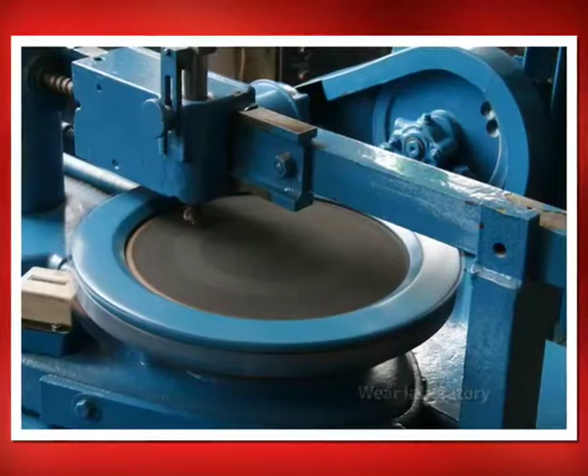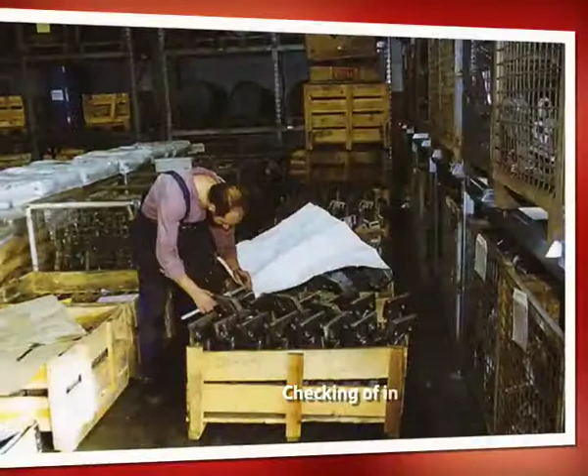Vautid's ongoing success is based on the research tradition established by its founder, Dr. Hans Wahl. The company's own laboratory systematically researches wear conditions and assesses hard-facing materials for suitability. Material solutions are created on the basis of this fundamental research that guarantee customers the highest quality and operating safety.

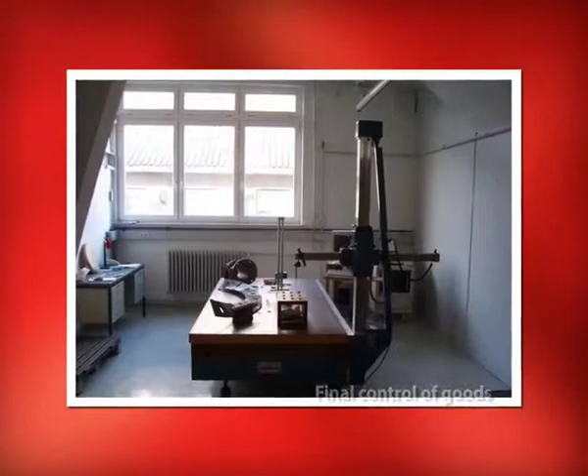The Vautid Group adheres to strict quality standards, from the receipt of goods to the final inspection, and is certified according to ISO 9001.

Vautid manufactures wear, heat and corrosion-resistant materials and products. Protection is supplied by build-up welding using hand electrodes, manufactured in Ostfildern near Stuttgart and dispatched around the world.

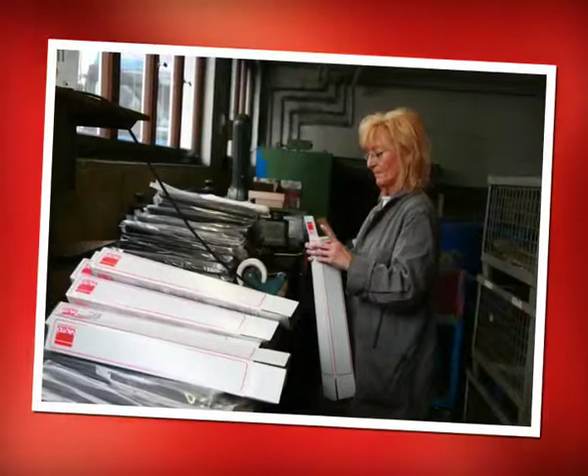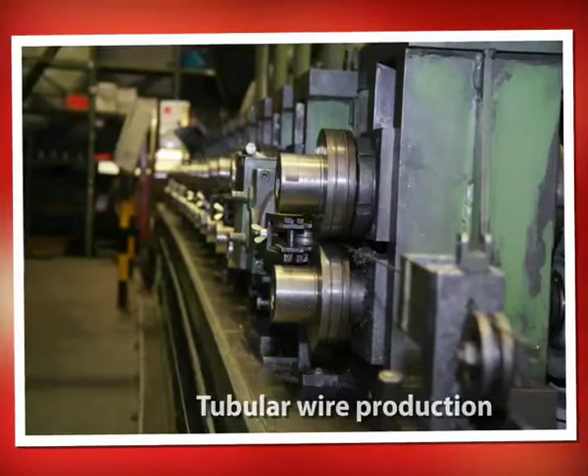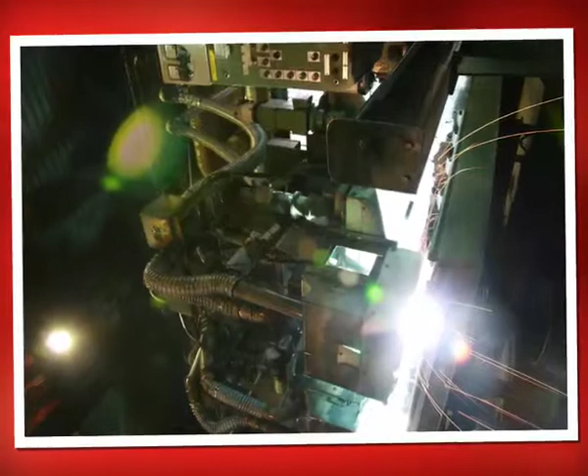A high-performance alternative to hand electrodes is offered by tubular wire, also produced in Ostfildern. Wear plates made of normal steel with a hard-facing layer of between 3 and 17 mm thickness have been part of the company's product range for over 30 years. These wear plates are produced in Wendlingen using the latest in plant technology.

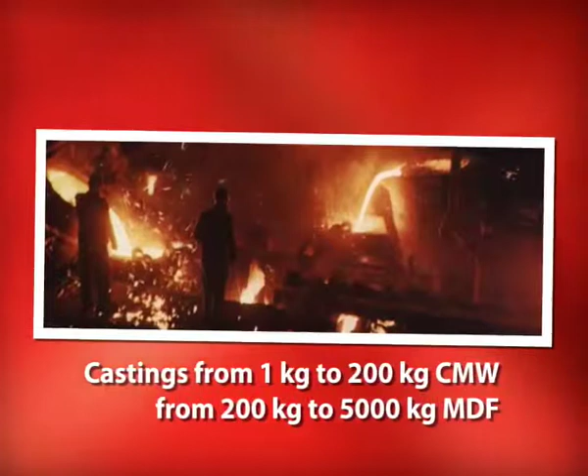At the same time, the company began developing wear-resistant casting materials. Vautid's 3 Portuguese foundries manufacture cast components in a range of weights from 1 kg to 5,000 kg. Typical materials are chill, steel or even manganese steel castings.

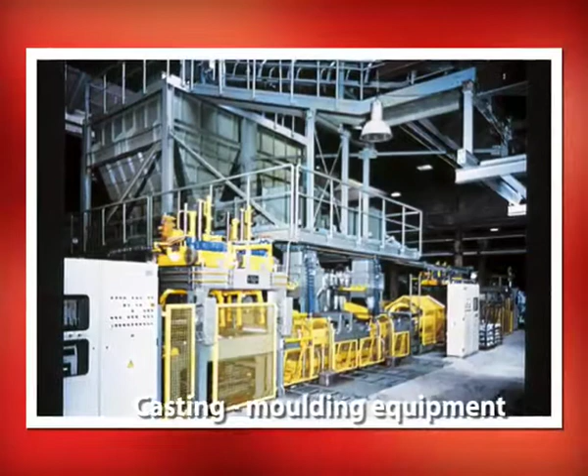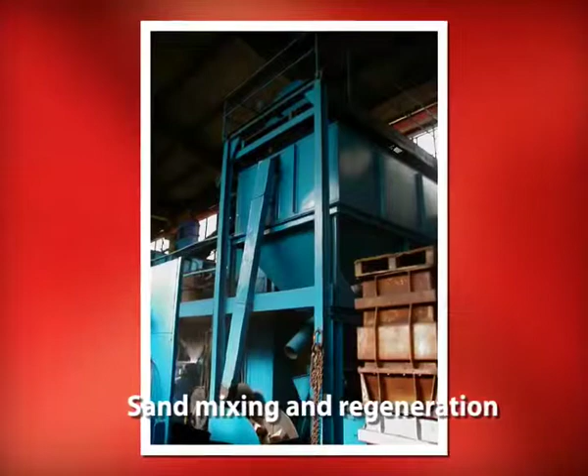Series production parts for the construction and construction materials industries are produced using high-tech molding equipment. Sand processing and mixing facilities increase productivity in the foundries. The foundry sand is almost completely recycled.

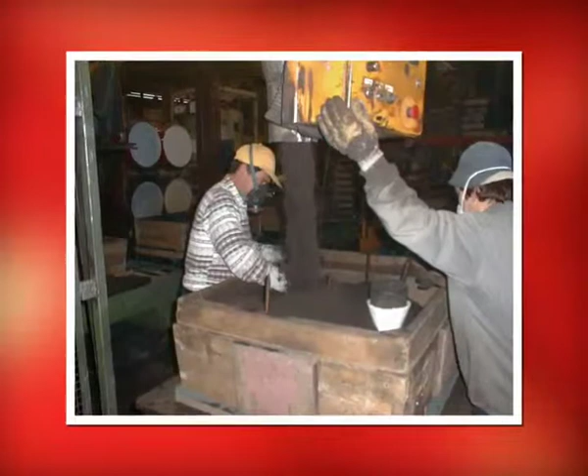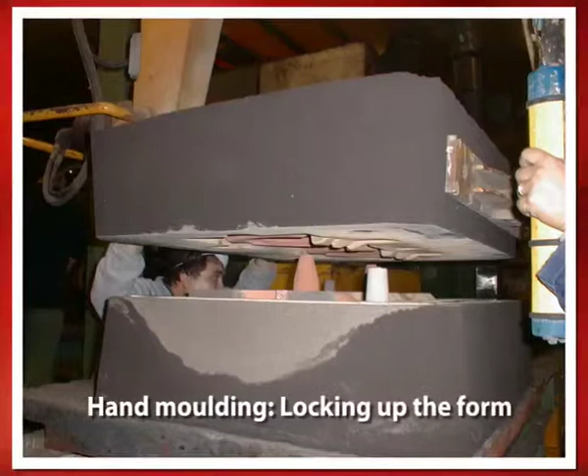Complicated one-off products with a maximum weight of 5 tons are produced using hand-operated molding equipment. Material samples prior to casting ensure the quality of castings remains constant. The material must be approved before casting can take place.

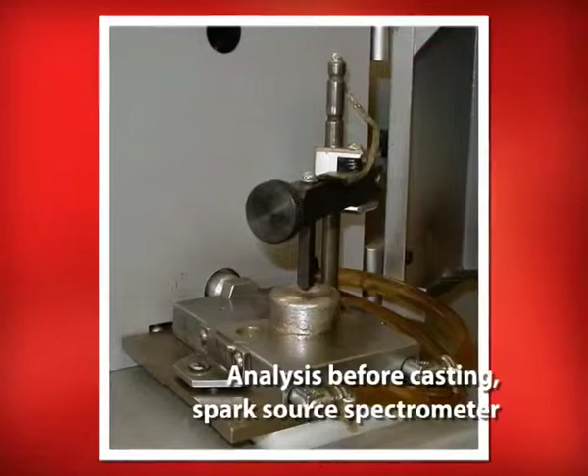Once cast, the material and sand mold are separated using automated machines. The castings are then blasted and fettled by hand.

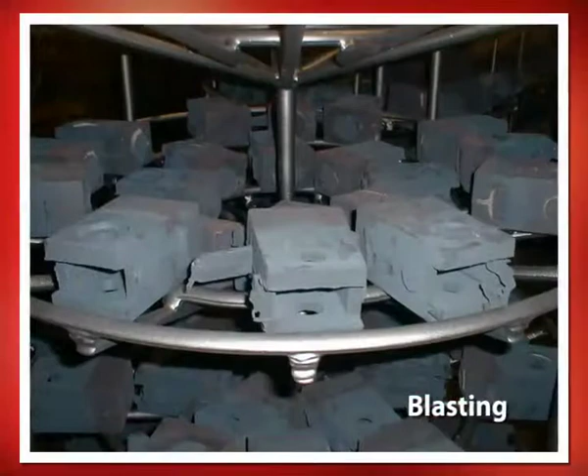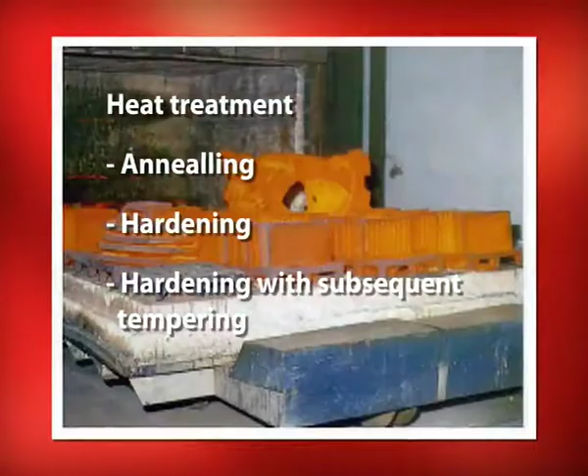Many components require both mechanical processing and heat treatment, procedures that are carried out in Vautid's own production facilities. Vautid offers servicing in its own workshops or on the customer's premises.

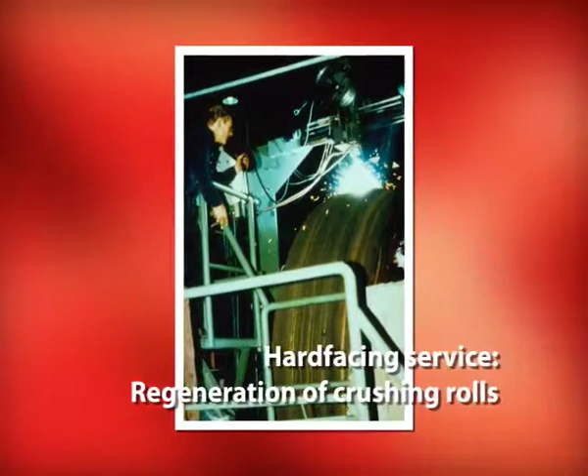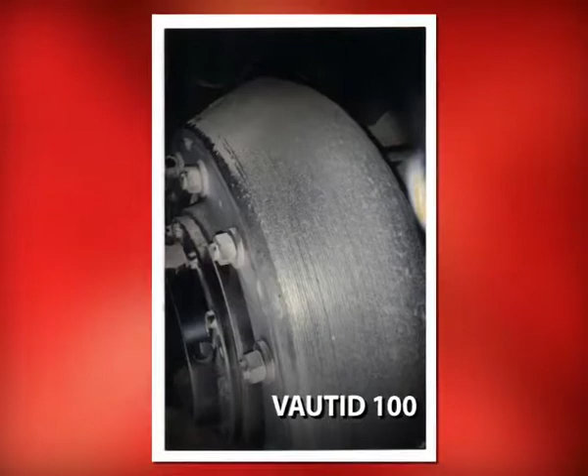Its range of products and services includes the regeneration of crusher rolls, crushing tools and other components used in the steel and construction materials industries.

With its 6 different wear protection technologies, Vautid offers the most comprehensive protection against wear created by abrasion, heat or corrosion. The production of hard-facing materials, wear plates and casting materials makes it possible.

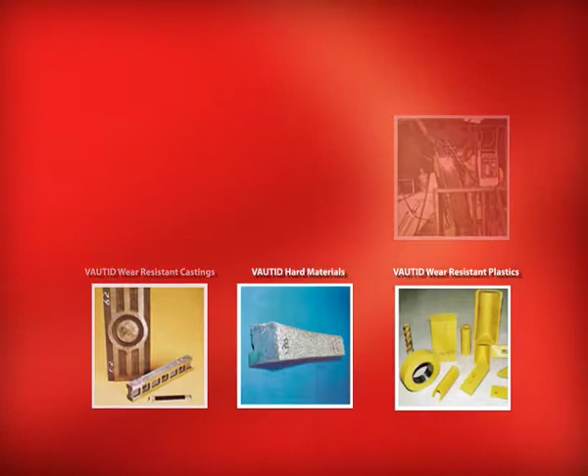Furthermore, Vautid offers a wear protection service, whether on-site or in its own workshops, for the regeneration of worn components. The wear protection range also features special hard materials and even plastics.

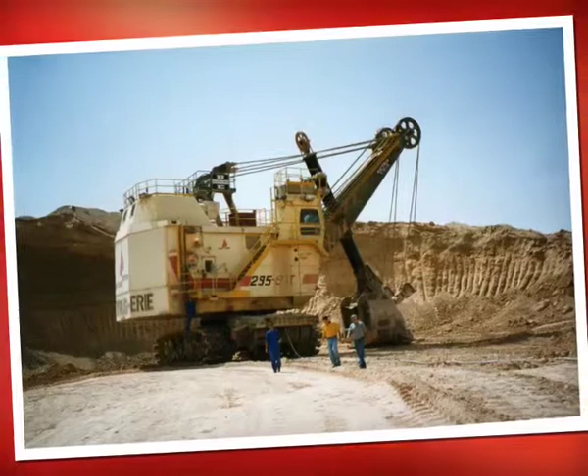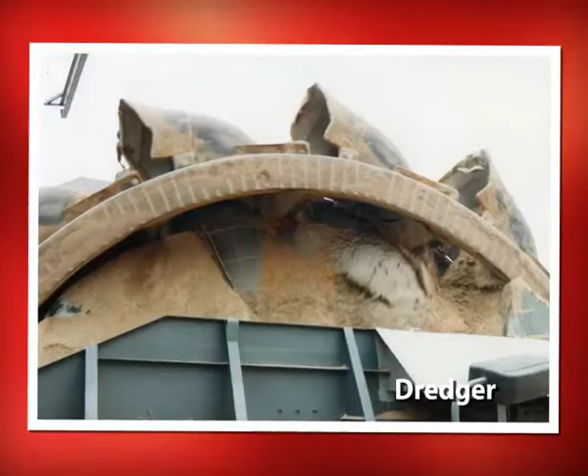A few application examples: wear protection in the mining industry. Wear plates or hard-facing materials protect the shovels of excavators and bucket wheel excavators. Machinery used both for extracting and processing minerals in sand and gravel pits are protected by Vautid wear protection technology.

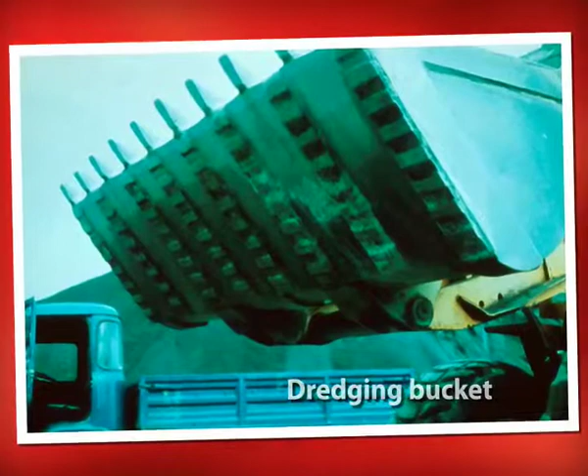Vautid wear plates offer wear protection for wheel loader excavating shovels and augers used to convey minerals from the extraction site.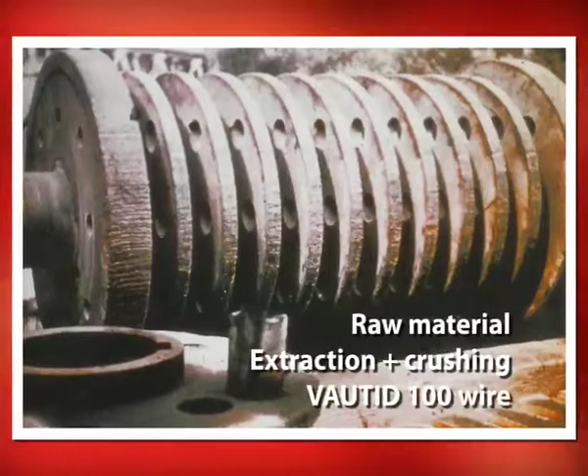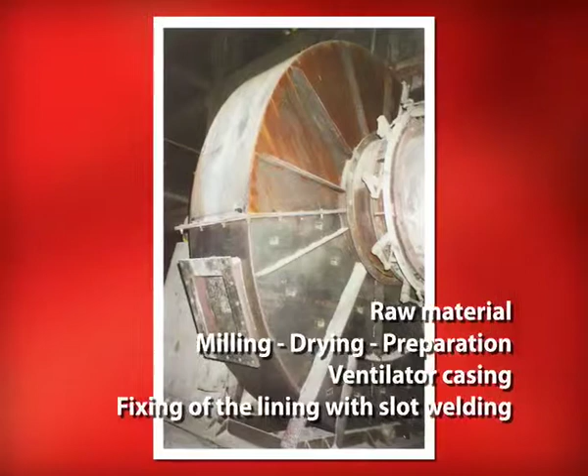The cement industry. Grinding tools used in the extraction and milling of raw materials are protected by Vautid hard-facing materials. Ventilators used to dry minerals are made of Vautid wear plates, reducing the necessarily high degree of wear in the ventilation zone. Hearths and firing chambers used in clinker production are lined with cast Vautid tiles and wear plates, offering long-term resistance to mineral wear.

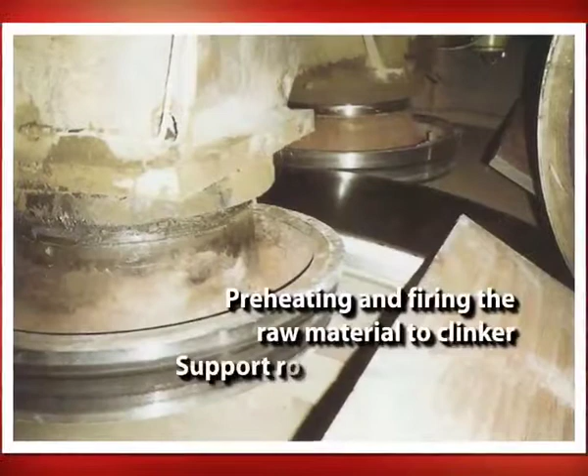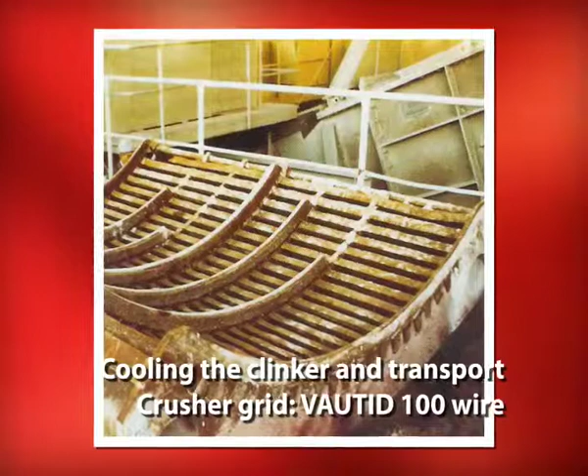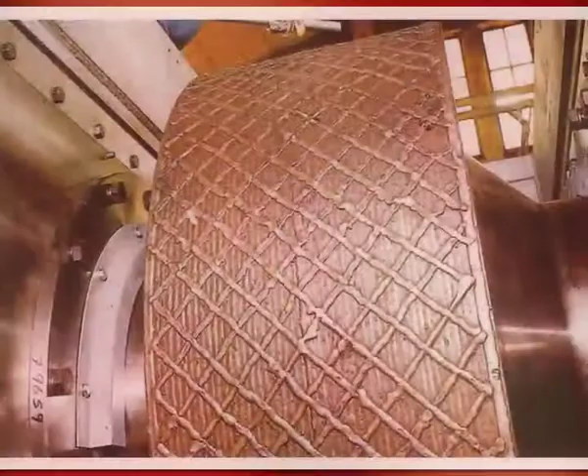Rotary kiln backup rolls withstand wear thanks to Vautid electrodes. The process of cooling clinker doesn't only cause wear, it is also associated with extremely high temperatures. Vautid tubular wire enhances wear protection and heat resistance of the grids. Vautid hard-facing materials protect high-pressure rolls used to grind clinker.

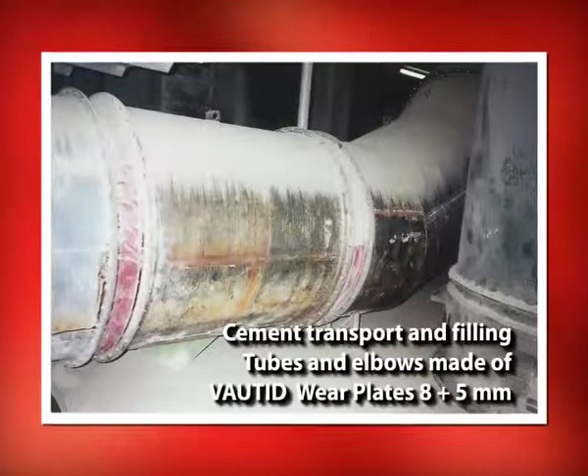Compressed air transport of cement generates a high degree of wear in all piping. These can also be manufactured using Vautid wear plates for optimized wear protection.

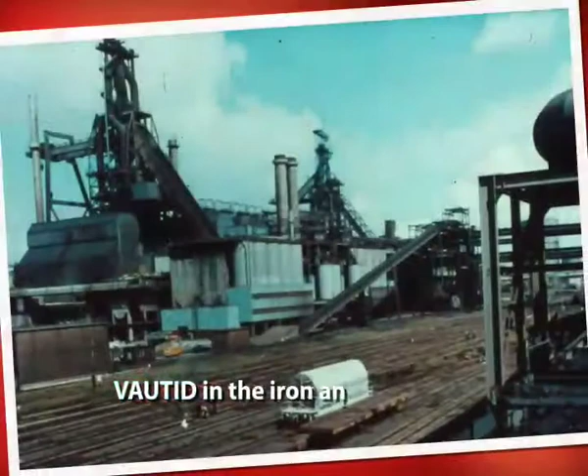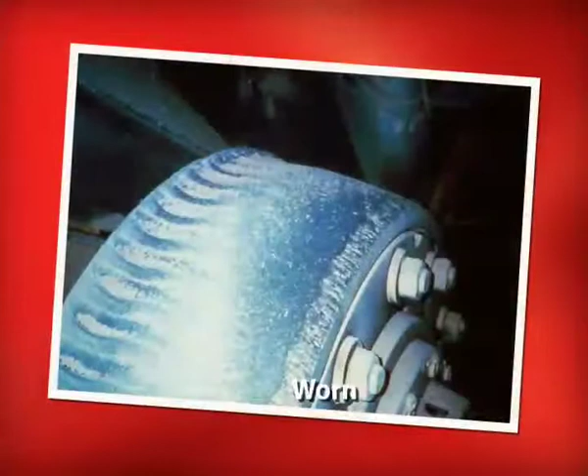Steel industry. Machinery such as sinter crushers are simultaneously exposed to extreme wear and high temperatures. Vautid casting and hard-facing materials extend the lifetime of machinery. The same can be said of their application in coal-fired power stations. Crusher rolls used for crushing coal are armored using Vautid hard-facing materials.

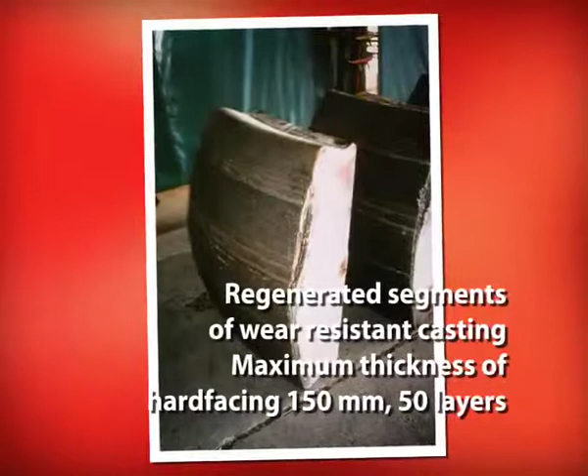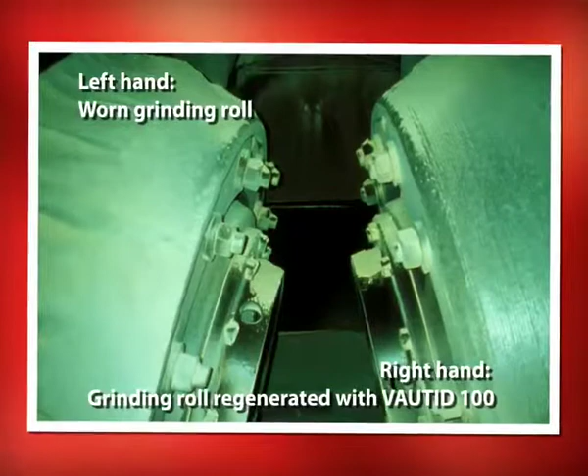Worn casting segments can be regenerated. A maximum facing thickness of 150 mm applied in 50 layers is possible. The original shape of worn grinding discs and rolls can be restored using hard-facing materials.

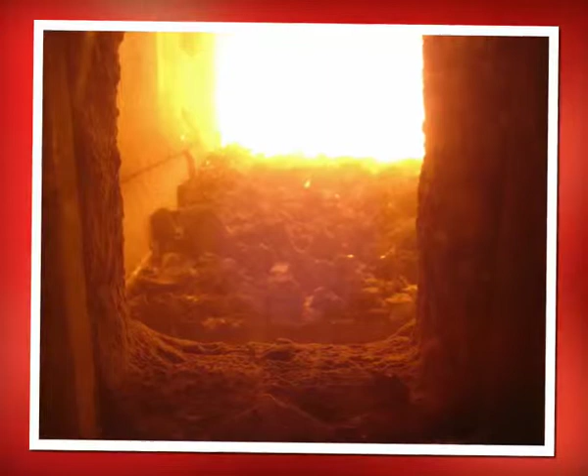Wear encountered in waste incineration plants is mainly concentrated on the grids where waste is deposited for burning. The grids are exposed to wear caused by the waste materials and heat. To combat this, Vautid has developed casting materials that are wear, heat and corrosion resistant.

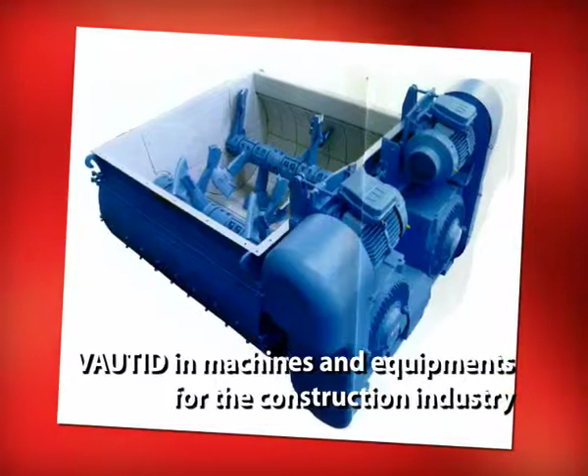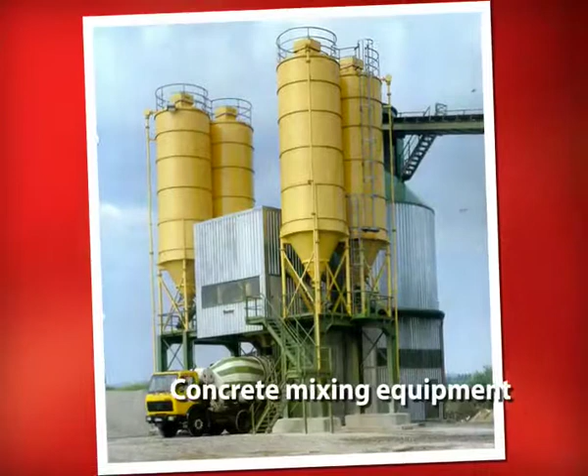The construction industry. One of the most varied fields of application for Vautid products is construction machinery. Vautid is present in practically every concrete mixer and is an essential partner for leading concrete mixing machinery manufacturers. Concrete pumps in action, protected from wear by Vautid.

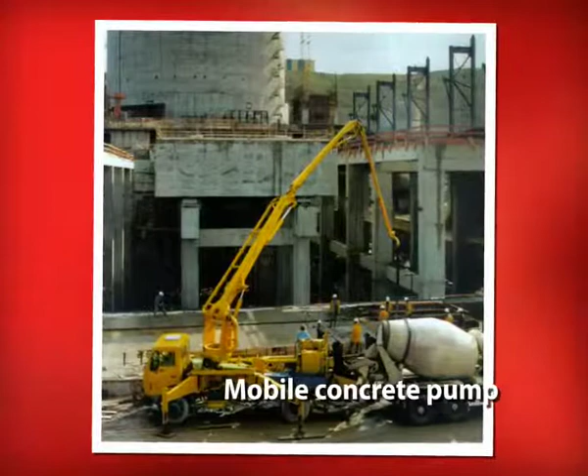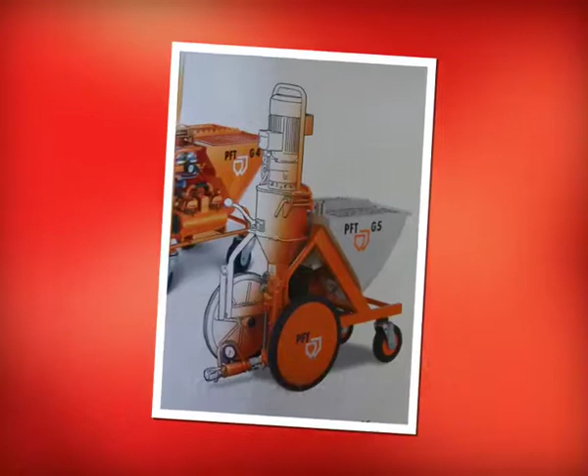Like concrete, mortar and render are also processed using feeder pumps. Vautid is the leading supplier of concrete and mortar machinery manufacturers.

Such varied customer demographics can only be served by a professional sales organization. Products produced in the different facilities are stored in a huge central warehouse before being dispatched to customers. The sales organization takes the form of a team. The cooperation of highly qualified employees is the key to the Vautid Group's success.

Innovation has always been the company's driving force. The history of wear protection began way back in 1946. Since then, innovation has been ongoing.

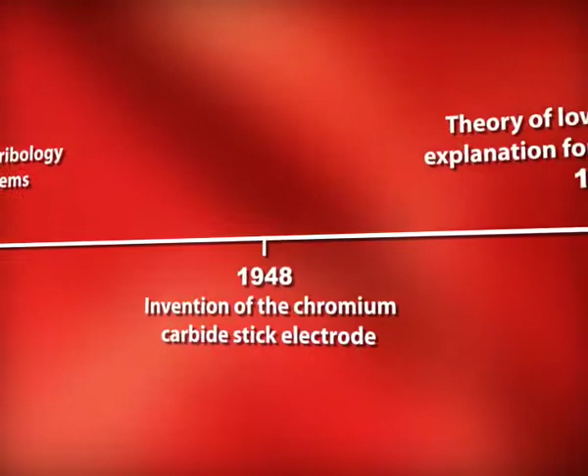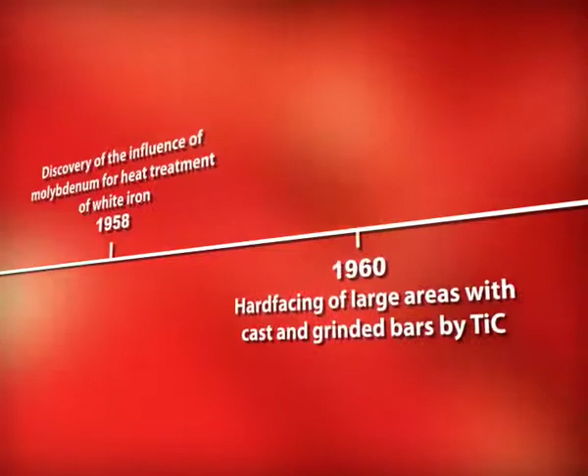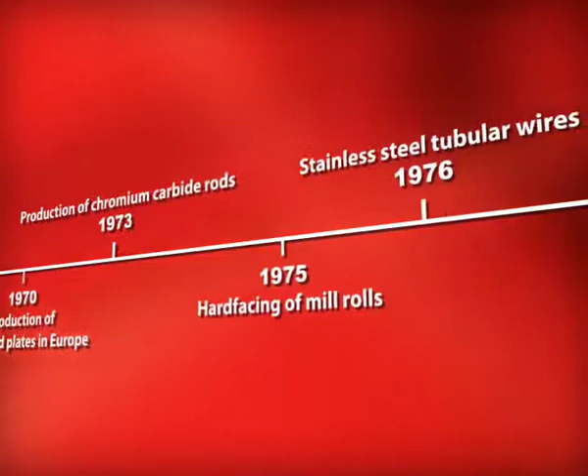1948: development of wear protection electrodes. 1958: expansion of the product range to include wear and heat-resistant casting materials. 1970: manufacture of wear plates begins. 1980: manufacture of products featuring bimetal casting begins.

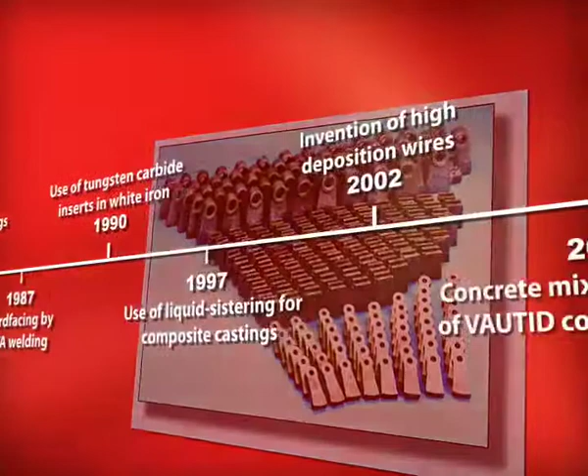End of the 90s: development of components that combine casting materials with ceramic or tungsten carbide. Concrete mixer shovels made of Vautid composite since 2006. White iron products with a ceramic component of more than 60%.

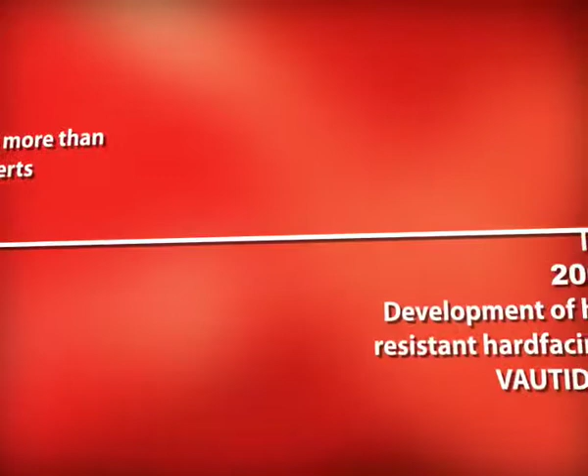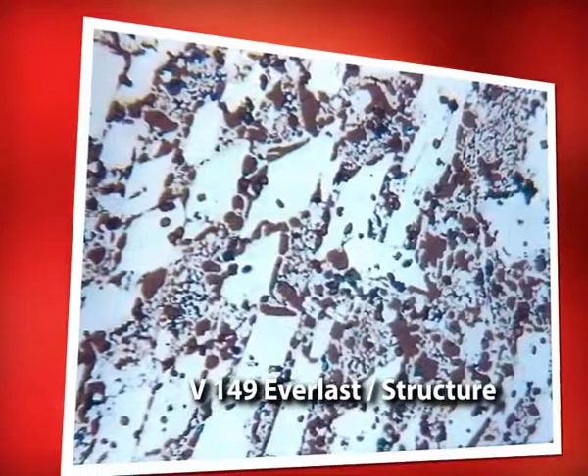2007: launch of an extremely wear and heat-resistant welding material, Vautid V149 Everlast, particularly suitable for applications in the steel industry. Bimetal casting products for components exposed to extreme wear during the processing of ultra-hard minerals, for example embedded ceramic components, or composite rods for use in cement mixers with ceramic.

Vautid, the environmentally friendly company. A long lifetime means sustainability. Sustainability is active environmental protection. By promoting a sparing use of resources, Vautid protects the environment. For instance, the Vautid foundries reintroduce scrap and components from previous Vautid production series into the material cycle for reprocessing.

Vautid, an innovative and environmentally friendly company.